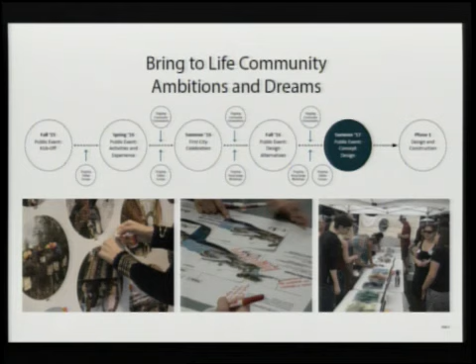And who all was at the OMSI event on June 3rd? This is a shot of one of the first of 2 presentations where we were revealing the design to the public, and we had well over 600 people attend this event at OMSI. We were very excited about the turnout and the positive feedback we received that afternoon. 2 presentations were given at different times during the day, and these presentations focused on Michelle Delk, who gave an overview of the design, and I'm going to give that to you today. So if you were at the event, I apologize, it might be a little repetitive, but it can't hurt to hear it again.

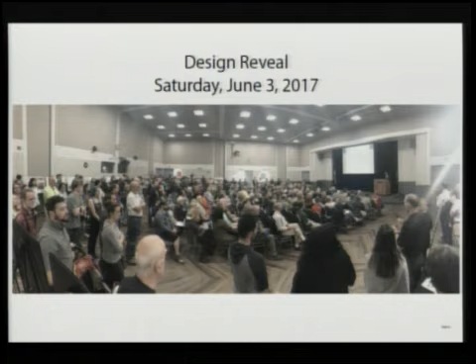Before we jump into the design, I wanted to refresh everybody about the key uses and how these programmatic elements were used to shape the design: falls viewing access, paths, walkways, and biking trails; collective gathering and event spaces; habitat restoration and natural history interpretation; river access and activities; PGE dam operations; historic reuse and cultural interpretation; and honoring Native American presence, past, present, and future.

Here is the existing conditions, the site as it sits today. We have divided the site into 4 different areas. On the left side of your screen is McLaughlin 99E, how it snakes up into the tunnel. Area 1 focuses on the North Riverfront. Area 2 is looking at the central area of the site. Area 3 is looking at the PGE Dam and Mill H, and Area 4 is focused on a connection to the Canemah neighborhood. As a reminder, Metro does not own the site; we have an easement with the landowner to construct the Riverwalk.

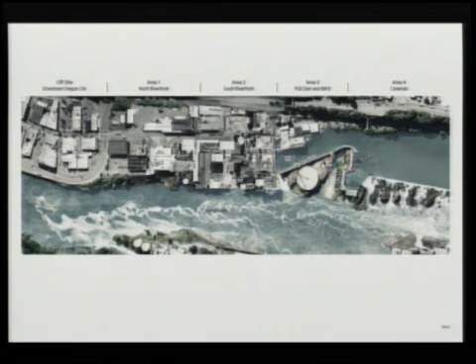And here is the proposed design. Everything you see rendered on the screen is what we're including as part of the concept design for the Riverwalk. The bullets at the bottom: public access, reusing structures—this is a working waterfront. We want to embrace that and acknowledge that PGE still has operations on the dam. We want to be considerate of the fluctuation of the river. We've done some hydraulic modeling with consultant CH2M to help us understand what those flooding conditions would be on the site. Habitat restoration is a very obvious component to the design, and then, of course, the redevelopment.

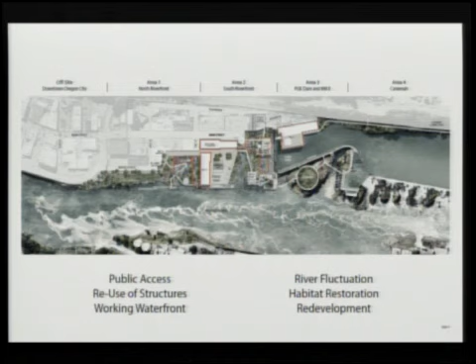Zooming in on 2 options we're carrying forward in the northeast or southeast corner of the site, because we don't necessarily have resolution at this point, and we wanted to carry these 2 options forward for flexibility as decisions are made, specifically around redevelopment potential and public infrastructure like the turnaround at Main Street, which you can see on the left image. On the right image, we've terminated Main Street a little short and exposed the Main Street trestle as a different scenario. We need to be considerate of PGE operations and maintaining their access to the dam. The orange outline shows considerations from the private landowner for potential development opportunities on the site.

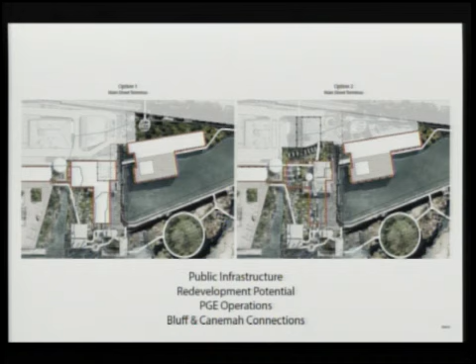So we're going to take a little walk along the riverfront through the eyes of the proposed design. What you see on the orange line is the virtual Riverwalk tour that we're going to take today.

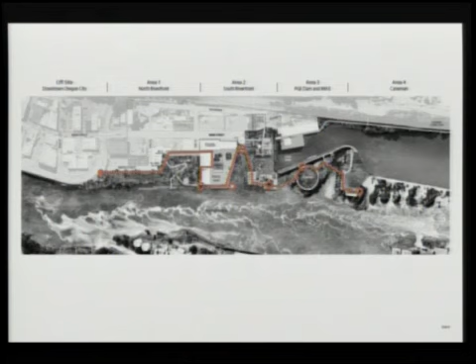Starting at the North Riverfront, this is the existing condition, and you'll notice the orange circles on a lot of these photos. These are little indicators to help you tie your viewpoint to these areas, because they'll remain in the similar location in the preferred design, just to give you a point of reference. What you see on the bottom is the bulkhead. In the middle is the corner of the pipe chase, and up on the top, the circle is the corner of the Mill O building.

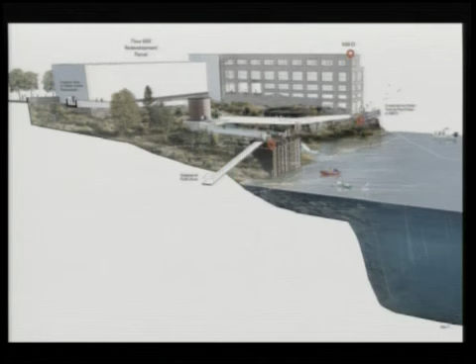This is the proposed design that indicates those same 3 circles for a point of reference. We are really looking at carving away a lot of the structure where paper machine 3 and number 2 are located, peeling back those buildings to expose an old tail race and provide expanded habitat opportunity, as well as the opportunity to expose what's underneath the paper machine buildings, which is an old historic flour mill foundation.

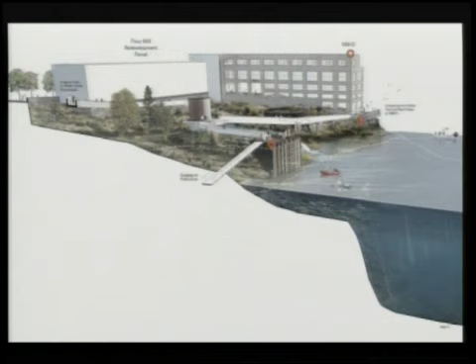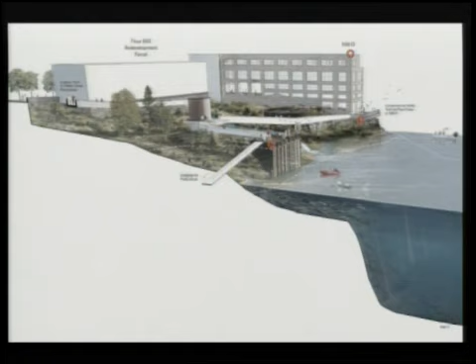The white trails that you see are what we're calling explorer paths, and these are elevated paths above the habitat enhanced areas, which would provide opportunities for people to get out a little bit closer to the river without impacting those natural resources. We're using elements like the bulkhead as a structure to tie the explorer paths to, so that we're not really creating new structure, but utilizing what we can and what is there today.

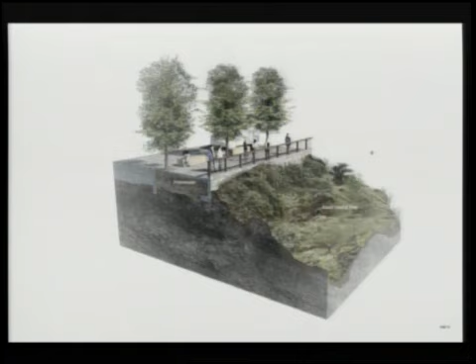This is an image of what the promenade could look like along Water Avenue, and how it would basically run up against the existing basalt habitat along the waterfront, just trying to illustrate what that condition could look like.

The next stop is the public yard area, which you see here. Please note, the orange circle on the left is the corner of Mill O again. The circle in the middle is the carpentry shop. And the circle on the right, I'm not exactly sure what that's pointing to, but just keep that in mind. The top of the cylinder. Oh, it's top of the cylinder.

And this is the proposed concept, which would illustrate how we are going to transform the public yard into a civic gathering plaza for downtown Oregon City. We are proposing this public yard to be cleared of a lot of those different structures, but the carpentry shop in the middle, that circle represents a re-envisioned or transformed carpentry shop into an outdoor flexible stage or pavilion. Mill O is maintained as a structure for public gathering or assembly. And we just have this large flexible plaza space with stairs that come down to the river.

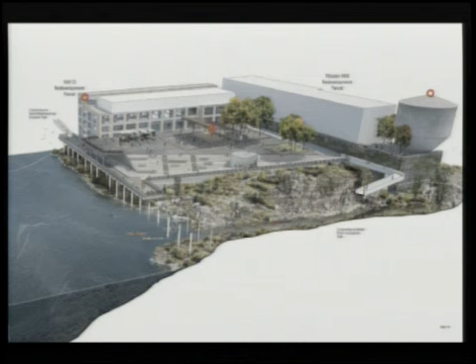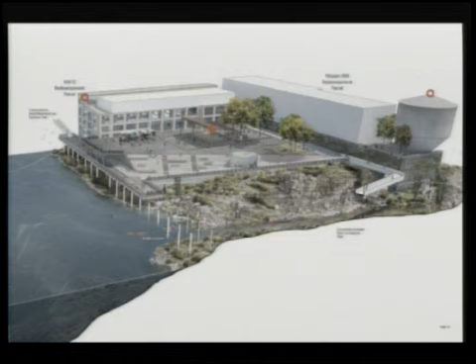And the pipe chase, which you see on the bottom of the screen, has been peeled back and removed partially to allow for the alcove that you see on the bottom to be created. If we pop back to the existing photo, that pipe chase really cuts off the river's edge from the site. Historically, we have photos that show a tail race that goes into the site, really similar to the condition we're trying to propose today, peeling back that structure in order to expose the existing basalt and enhance that habitat area.

Alex, and this is also phase one of the construction. Partially, okay, I'll get to phase one in just a second. Okay, yeah.

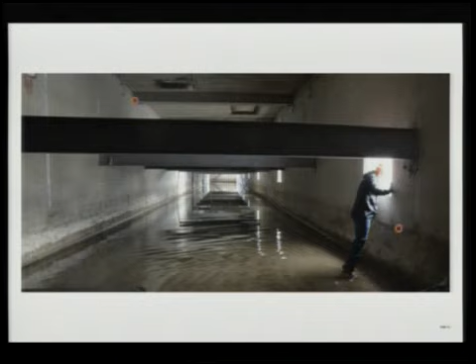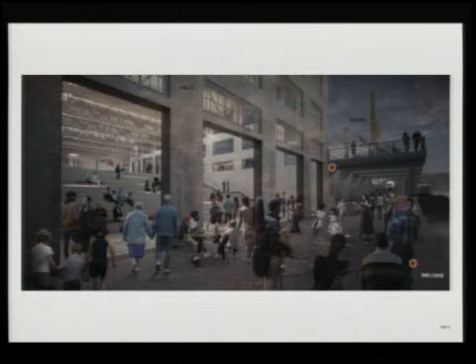This is a photo standing inside that pipe chase, which was used to convey storm water. As we move back into the preferred design, you can see how we're peeling back the top layer in certain areas of the pipe chase to create more of this porch-like atmosphere that connects to Mill O and serves as another spill-out location for public gathering spaces. You can see the top of the pipe chase on the right side, which is where the existing floor or surface is today, and then peeling that back so we have a lower level accessible for people.

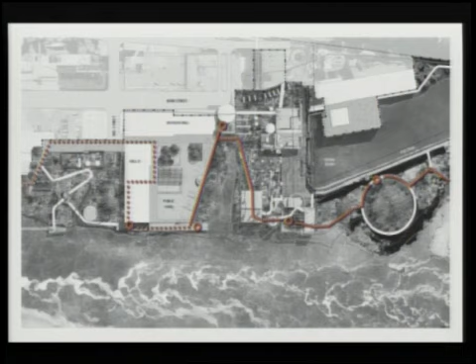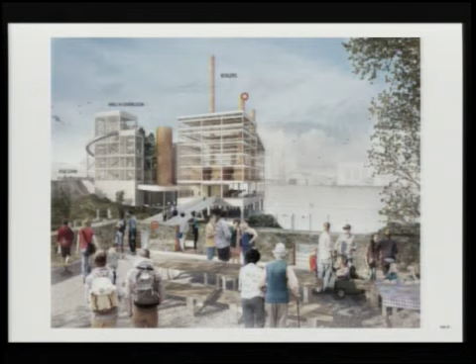The dotted line indicates where we've been, and the solid line indicates where we're about to go. So we've looked at the pipe chase, and we'll be heading up to that cylinder, and we're going to look back at the Mill H area, which I'll show you in a second. This is the view that exists today - we're standing at the cylinder, looking at the boiler chimney stacks. This would be the view from that same location, peeling back a lot of the metal transite siding to expose the structures, to expose the boilers within, creating a public gathering space in a different form than it is today. I'll zoom in on what that viewpoint will look like.

And yes, that is a large slide on the left. We're proposing a large play tower with a slide.

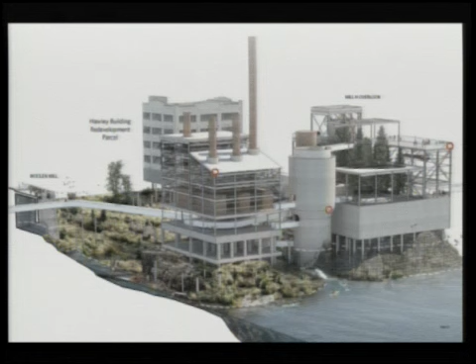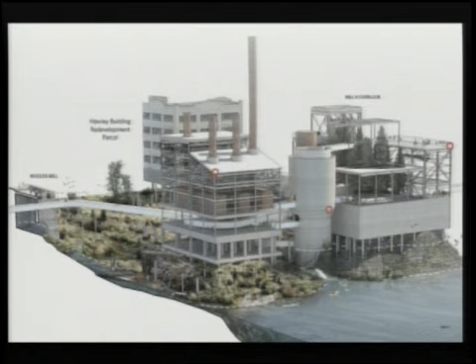We're going to swing around. We're kind of hovering over the river now, looking back at the Mill H area. You have the clarifier on the right. This is a view showing the connection from the public yard via the Explorer Trail, that elevated pathway on the left, which would connect to these different structures and make grade. We have about a 10-foot grade change between the yard and the Mill H building, and we're proposing a series of ramps, stairs, and an elevator to make this accessible in order to reach the viewing location, shown in the top right orange circle.

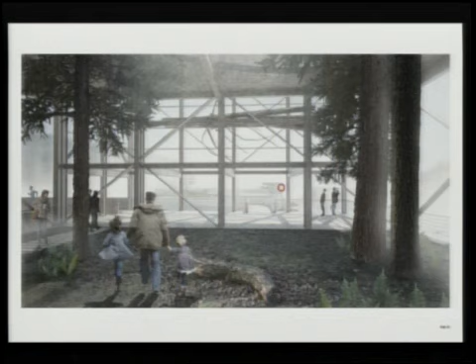This is the view from the existing Mill H reject building. This would be the view in the proposed condition, showing we're really maintaining those existing beams and structures of the buildings, but peeling back the transite siding and exposing this to have it be in an open-air condition.

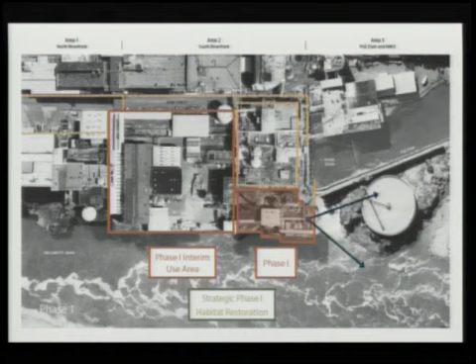Here's the phasing approach we'll be taking as part of this project. What you see in the bottom right corner is the phase 1 area, which we'll be highlighting, and I'll show what we feel like we can accomplish within phase 1. During that phase 1, there will be an interim use area located in the public yard, outlined in the center. Everything outlined in orange is a structure that would be demolished as part of phase 1.

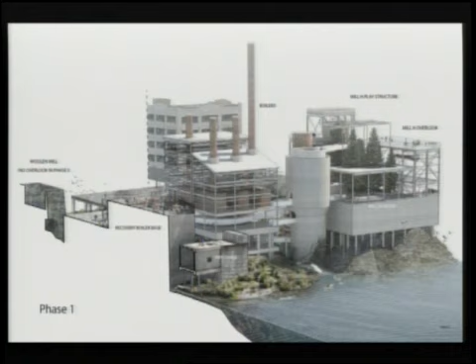So the stock cylinder shed on top of that cylinder, the pump station, the recovery boilers, and the power station - the three buildings or structures on the left - are really to be demolished in order to set ourselves up for future phases. This would be the condition of phase 1. The recovery boiler would be demolished to existing surface level, so our interim condition would look something like this, where maybe there's an opportunity to provide tables and chairs for public gathering in the interim use. But everything else you see is considered fully envisioned or developed as part of phase 1 - exposing the beams and trusses of the boilers, exposing those stacks, creating a connection via the cylinder and elevator, and then getting to the Mill H area.

The interim condition in the yard - again, everything in orange is something we're looking at demolishing as part of phase 1. So the pipe shop, the pump station, the auto shop, millwright - all of those would be removed, again, to help set us up for future phases.

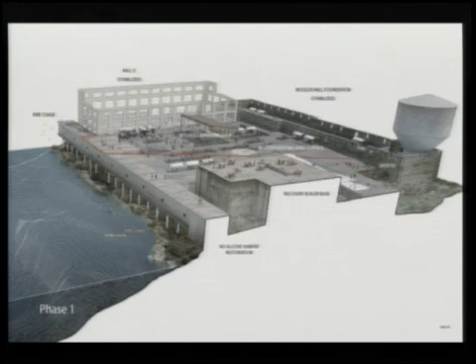This would be the condition of the interim use. The surface level of the yard would not be considered new as part of phase 1 - we would be utilizing the existing surface in the interim condition, but then reusing the carpentry shop perhaps as a gathering space or pavilion that we envision throughout the conceptual design of the Riverwalk. What you see in the middle, the recovery boiler, is just another view of what that would look like if we removed it down to the existing surface level.

The orange diagonal line is just a reference point so you can see where that alcove would be carved out in a future phase. That orange line shows the extent of the final build-out of the civic gathering space. The interim condition, of course, would be a lot larger and more expansive.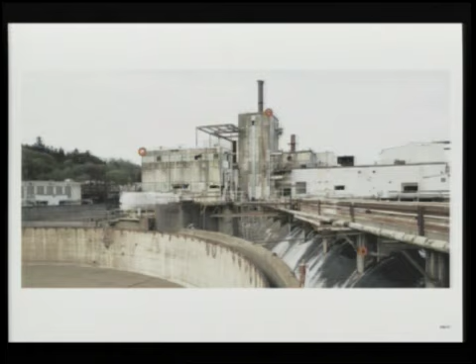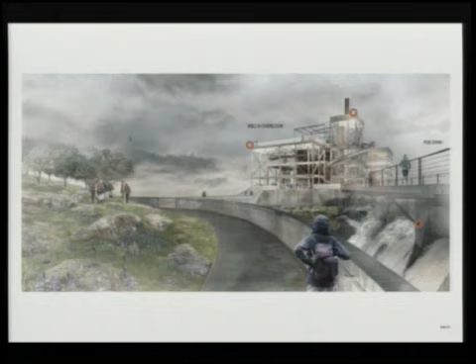We have PGE Dam on the right, and we're kind of hovering over the clarifier in this photo. This would be the proposed condition of the clarifier looking back towards that overlook.

We are proposing to fill the clarifier in and create a habitat that might be more contextual. We're filling the clarifier in to create more of a connection to some of the existing habitats that might be found in the region. So this is showing perhaps basalt with some camas, an oak savanna type habitat inside the clarifier.

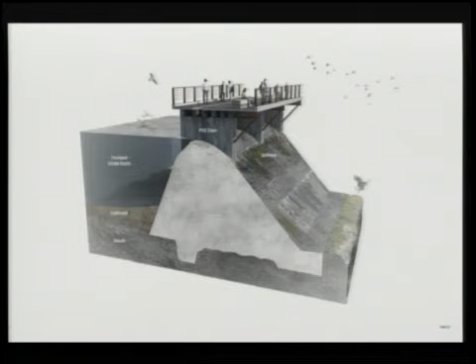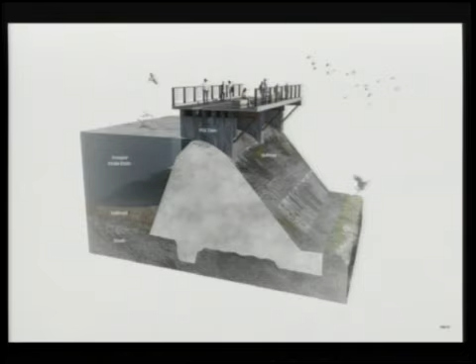And this is a photo of what the proposed dam could look like for PGE, expanding the current footprint of it to allow more space for public access, but still allowing them to continue operations and maintenance access.

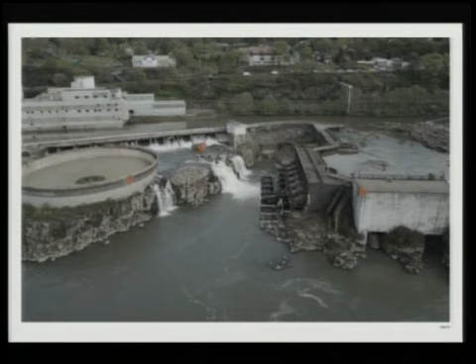Here we are hovering above the clarifier. The structure on the right is the Hawley Powerhouse Foundation. This structure would be the future overlook in a future additional phase.

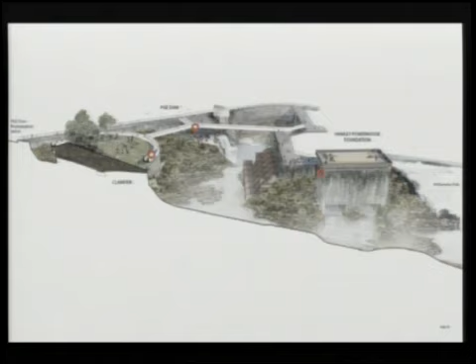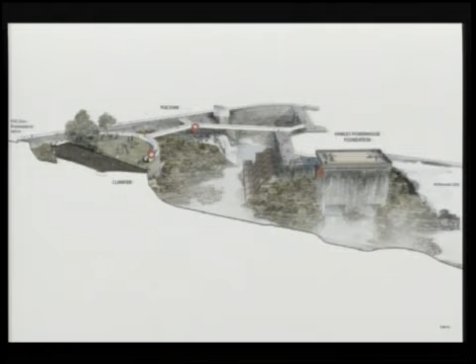What I like about what this photo conveys are the explorer paths that connect - these alternate pathways that connect from the clarifier to the future Hawley Powerhouse Foundation overlook. We don't want to be reliant upon PGE for access at all times, because they may need to close their dam for certain operations or maintenance, and we want to make sure we can maintain that public access. That's why we're providing an alternate pathway opportunity.

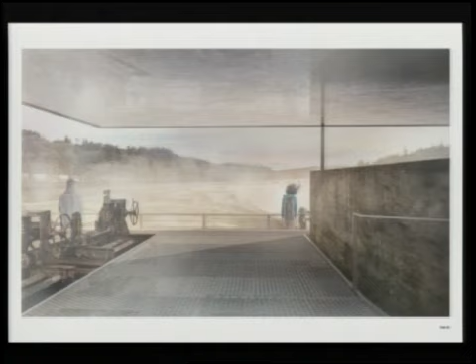And then this would be the view from the future overlook, looking out at the falls.

And that's what I have for you today. Does anybody have any questions? I know I went through it pretty quickly, so.

Got a question. I notice you have quite a few elevated observation areas, and those are accessible for the handicapped, people in wheelchairs and maybe walkers and things of that nature. Yes, that is correct. All of the pathways would be ADA accessible as far as width, grade, and as well as alternate routes via elevator, for example, to get you up to those viewpoints.

And for people 80 years old, 90 years old that can make it, do you have rest areas so they can sit down and take a load off, maybe? Yeah, I think throughout the entire Riverwalk area, there will absolutely be options to stop and sit and rest. For example, at the North Riverfront, there's the explorer trails that go out closer to the river's edge. Those are not within the main pathway, so those are different options for stopping and resting, and for prospect viewing.

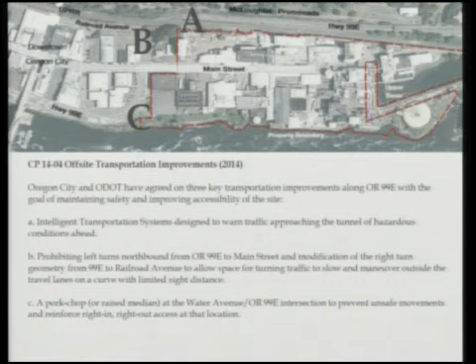This is a picture from the Vision and Master Plan showing economic redevelopment on Main Street. A transportation management plan is required for both the Riverwalk and private development when it comes in.

One of our hopes in reducing or removing barriers for redevelopment is the work that Rick and his team are doing, and will do in the Riverwalk, providing a lot of understanding of private opportunities for transportation demand management that private development could use in later phases. So we'll talk about the universe of options, but some may not be implemented until private development comes in.

As part of this, our goals for this access, transportation, and parking plan are: to reach a shared understanding of the issues involved as we go through our public outreach; to create a long-term, metric-based strategy that can guide us through all the different public and private development phases; to achieve Planning Commission approval of the strategy, since it's a condition of approval of this future land use application; and to always have actionable next steps, so we don't end up with a strategy and plan that just gets put on a shelf.

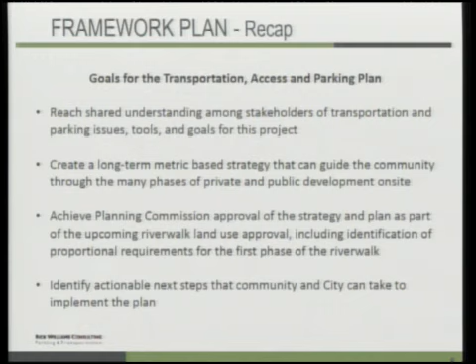So I'm going to hand this back over to Rick to talk a little bit about the work that he and his team have done, and some of the feedback he's received from our two summits. I'm not going to let you off the hook yet.

Okay, one more. I think Alex has shown where we are today. We're moving forward in the fall with a land use application for phase one, and really looking at construction starting in the spring or summer of 2018. So this Riverwalk strategy for transportation demand management is looking at short-term, mid-term, and long-term projects that we can take on through all the phases of the Riverwalk.

Thanks, Christina. Yeah, what we're really trying to do is create a parking and transportation demand management access plan—it's a big phrase. What we're trying to do is work with the community so that they feel confident that, as Christina said, we're expanding the universe of trips.

A lot of times, when you think about a parking plan, the only type of trips you think about are parking. But because of the constrained nature of the site and the unknown evolution of the project, we need a plan that's responsive to change as it happens. We also need to realize we're growing different types of access beyond what we do now. We know there's parking, but there's also transit, biking, walking, pedestrians, residential growth—opportunities we're not even thinking about now. That's what this plan is striving to do.

So why do transportation demand management? What's been nice about testing some of these ideas with the community is it reinforces some of these key guiding principles or success measures of cities that are successful in doing transportation demand management.